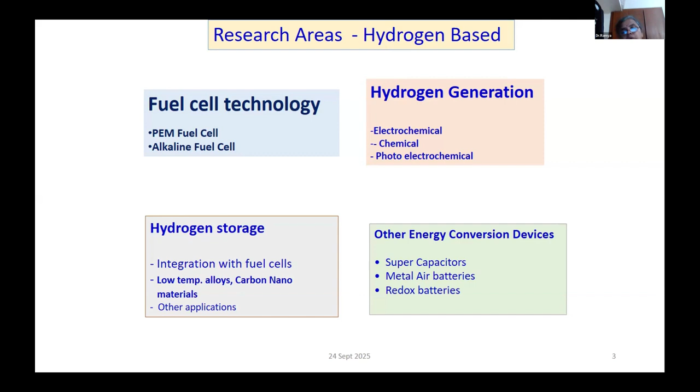And we also do some redox flow batteries, basically vanadium based redox flow batteries. Coming to the technology as such, like the previous lecture, you would have heard about energy storage systems. These are basically capacitors, supercapacitors, or batteries.

So when do you select which product? If you want a lot of energy for a short span of time, you would go for capacitors and supercapacitors. Battery gives you energy for a longer duration, but the power density will be less compared to capacitors. So if you want a short burst of energy, like to crank a vehicle, and that time it draws more current from the battery, it is not very good for the battery. Suddenly you are drawing more than the rated capacity.

So you use a supercapacitor or a capacitor in conjunction with the battery. Once the cranking is over, battery takes over. Batteries have a limited capacity, in the sense of the energy being stored within the battery. Once that energy is consumed by discharging, you do not have any more capacity for the vehicle or whatever as a power generator. So you have to recharge the battery, and that is likely to take several hours depending on the type of battery.

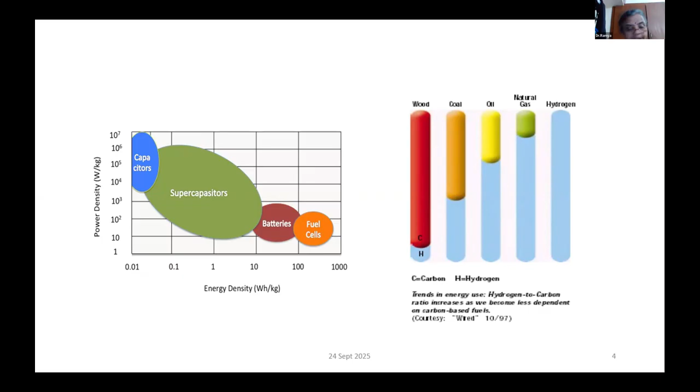What is the advantage of a fuel cell? Because you use hydrogen, the emissions are very less. When you use wood, coal, oil or natural gas, the carbon emissions are higher. But when you use a hydrogen based fuel cell, the emissions are nil, because only hydrogen and oxygen combine to give water, which is the only byproduct.

So fuel cells are of many types. Like I said, we are doing polymer electrolyte membrane based fuel cells. You have other types also - phosphoric acid, molten carbonate, or solid oxide. It all depends on what is your working temperature and what is your electrolyte.

If you are looking at low temperature fuel cells, alkaline or polymer electrolyte membrane based fuel cells are useful because these operate in the temperature range of 50 to 80 degrees centigrade, and they can be easily started - amenable for low temperature startup. They are quite well developed, in the sense they are commercialized. There are buses running with polymer electrolyte membrane fuel cells, with a good efficiency of about 50%, and you can have hydrogen or methanol as a fuel.

If you are looking at working temperature of 160 to 220 degrees centigrade, phosphoric acid is the go-to technology. The advantage of going from low temperature to higher temperature is that your hydrogen need not be very pure. In case of PEMFC, your hydrogen has to be more than 99.999% pure - 4-9s or 5-9s. Then only your fuel cell will have a long life.

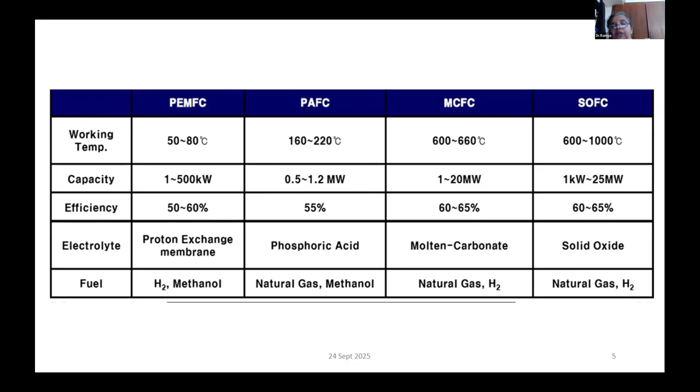If your hydrogen is from a reformer where it can contain some amount of carbon monoxide, a few ppm, it is better to go for phosphoric acid based technology, which can accommodate this, because the higher the temperature, the catalyst can withstand these kinds of poisonous gases and performance can still be retained. Molten carbonate and solid oxide fuel cells are technologies which work at very high temperature. You have higher efficiency because the heat generated is of very high quality. You can have combined power and heat generation - when you attach those systems, your efficiency increases. So they are very good, and you can use a higher percentage of carbon monoxide, or natural gas in some cases.

So what is a fuel cell? Basically, it is like an electrochemical cell, just like a battery. It has an anode and a cathode, with the only difference being that chemicals are stored outside the cell and fed into the cell when required. So there is no self-discharge kind of thing in case of a fuel cell, because you are feeding the chemicals only when it is required.

Chemical materials are stored outside the cell, fed into the cell, and react electrochemically, converting chemical energy to electrical energy.

In the diagram, you can see a typical fuel cell, which is a PEM based fuel cell. Hydrogen is fed into the anode, and oxygen or air is fed to the cathode. At the anode, the hydrogen is split to form two protons, which pass through the electrolyte and react with oxygen to form water at the cathode. The electron movement gives you the electricity.

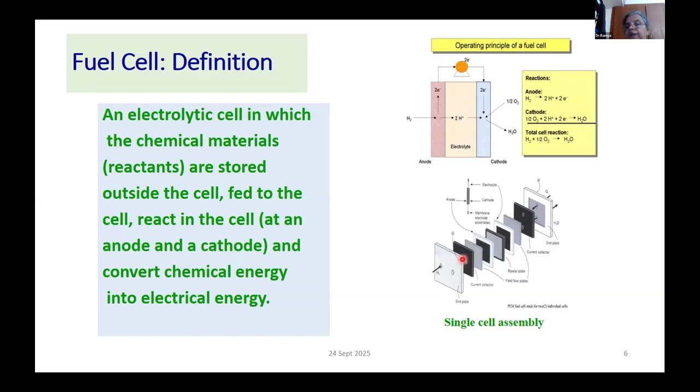A typical single cell assembly requires, since you are feeding gases, some method to feed the gas into the cell. You have to ensure the cell is leak proof, so the gas does not flow out, and it is useful for the reactions. A typical cell has an end plate, a current collector, a gas distribution plate, and a membrane electrode assembly, which is the heart of the fuel cell, where the anode, cathode, and electrolyte are present, along with some kind of sealing system so the gas does not leak.

So what is the difference? Reactants are stored inside the battery, but here they are stored outside. In a battery, there is a possibility of self-discharge; here there is no self-discharge. A battery is grid dependent because you have to recharge it, so it becomes grid dependent. Here, since everything is stored outside, it is grid independent.

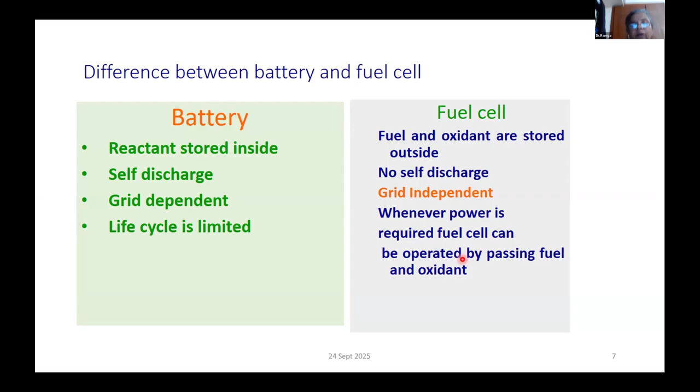The life cycle of a battery, you would have seen some 500 cycles or 1000 cycles depending on the type of battery - the life cycle of the battery is limited. Here you are getting power whenever you feed gases into the system, and a typical life of a stationary fuel cell is more than 40,000 hours, and for a vehicle system it is more than 10,000 hours. So the life is not limited by the number of cycles.

So why do you choose PEMFC? Because it is scalable - you can design cells depending on whatever capacity you require, from low power applications like portable applications to a power station. You can combine multiple cells depending on how much power you require, and they are efficient, with more than 40 to 60% efficiency, and they are reliable, and their response time is very fast.

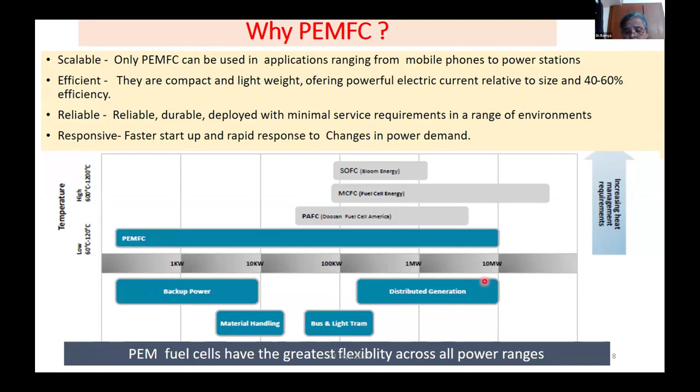If you look at the fuel cell, PEMFC is applicable for all kinds of applications, from low power to high power - 10 megawatt is also available. PAFC normally is employed when it's not for day-to-day home application where you start at low temperature - they are normally used as stationary power at a very high kilowatt level. Both molten carbonate and SOFC are also for stationary power at a large scale level. Whereas PEMFC is used for all backup, material handling, buses, and distribution systems, so it has a lot of flexibility across all power ranges.

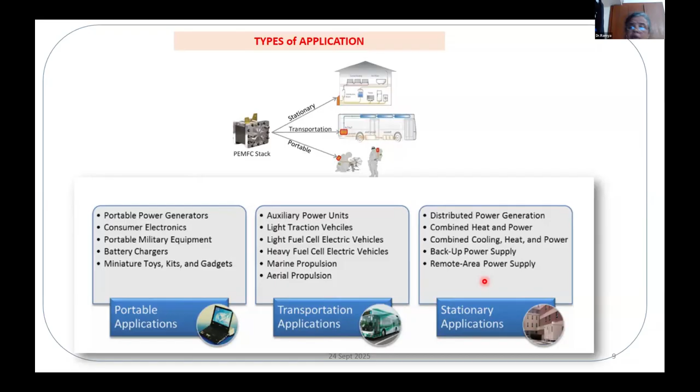A typical application for a fuel cell can be for consumer electronics, small portable military equipment, battery chargers - it can be any of those things. For transportation application, you have seen our minister driving a Toyota Mirai car. You have heavy duty vehicle applications, and you can also use it as auxiliary power for various applications in vehicles. On the stationary side, you can have distributed power generation, combined heat and power for homes and other applications, and as backup power for telecom applications - an immense number of applications are possible with a typical fuel cell.

So how much voltage does an average fuel cell, any single cell, generate? Theoretically, it can generate 1.21 volts. However, because of various losses, you get over-potentials and losses because of the catalyst, called activation loss. Your fuel cell will start at somewhere around 1 volt, but at 1 volt you will not get any current - it's only an open circuit voltage. Once you start drawing current, the voltage comes down. A typical fuel cell operates at around 0.7 or 0.6 volts and remains constant.

You can draw current - you have a region where the voltage is more or less constant, and that is the region where you have ohmic losses due to resistances from the membrane and contact resistances. Once you start drawing still more current, the voltage starts to fall suddenly - this is called the mass transport region, where you are not able to feed more oxygen or hydrogen in the short span that is required. So you operate the cell in the ohmic region.

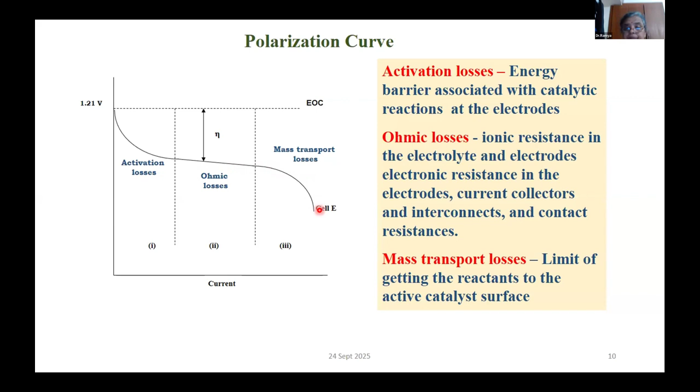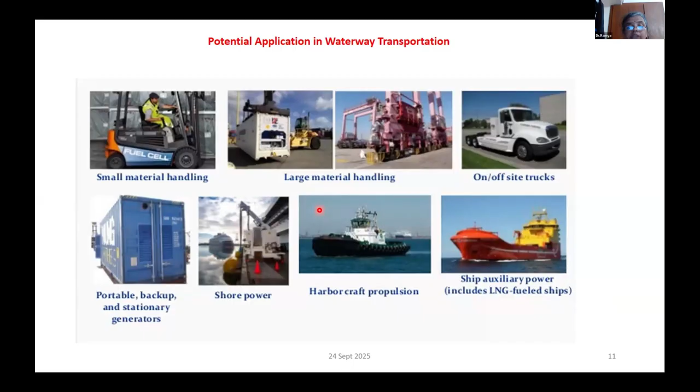So, like I said, potential applications are many: small material handling, or large material handling, off-site trucks, portable backup power generator. Kerala was the first to demonstrate a boat with a PEM fuel cell.

Now in the land, trains, buses, and long-haul trucks are the main application. India has recently completed testing of its first hydrogen-powered fuel cell train, built in Chennai. The prototype will run between 2 points in Haryana, and the government proposes to deploy 35 such trains on heritage and hill routes to reduce emissions.

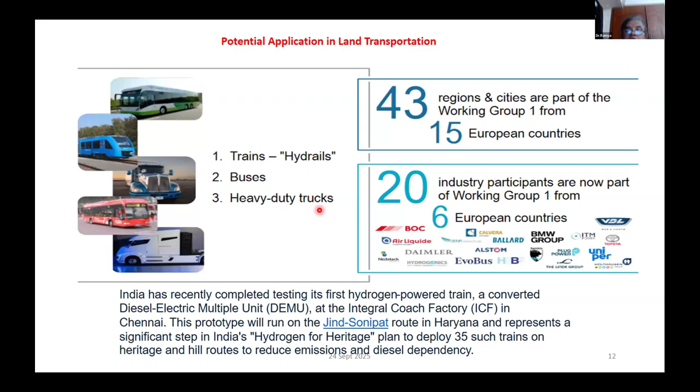A little bit about the history of the fuel cell. In 1799, a French scientist said that hydrogen can be used as a force that can be applied on all machines. The first cell was a water electrolysis cell back in 1939. Then in 1959, there were fuel cell prototypes sent on the Apollo missions.

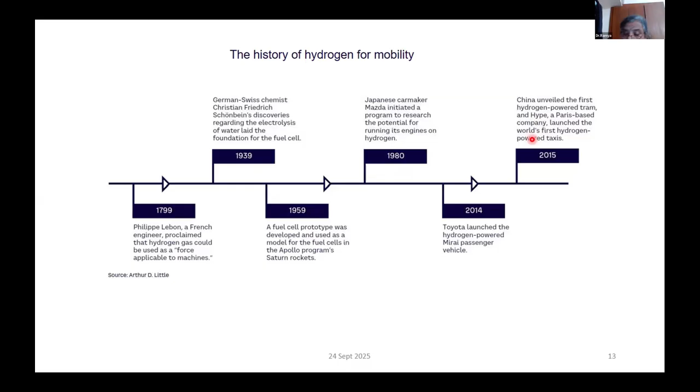In the 1980s, car makers Mazda and Toyota launched hydrogen-based vehicles. Toyota has the Mirai, which is a car. Now there are trains and many other applications for hydrogen. This is basically hydrogen for mobility applications, whatever I have covered.

Having seen all these things, what are the major materials and components that are required? Since it's a polymer electrolyte membrane fuel cell, you need a membrane, and then there is an anode and a cathode. Both require a catalyst, so you have to break hydrogen H2 into H+ ion, and you need some kind of catalyst for that.

Similarly, oxygen has to react with the hydrogen H+ ion, so you need a catalyst for the oxygen reduction reaction. Both catalysts mostly applicable in PEMFC are platinum-based, noble metal-based catalysts.

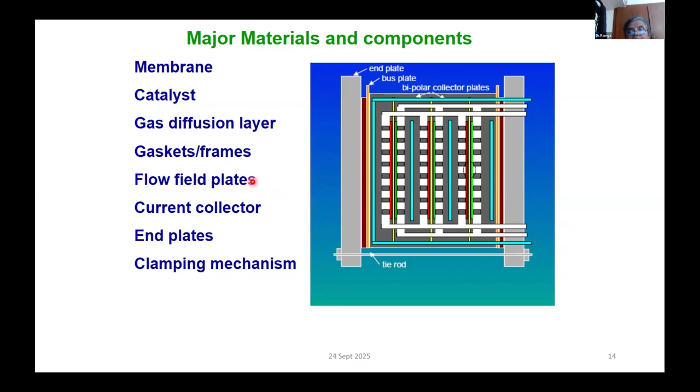Then you have what is called the gas diffusion layer. Gas has to be supplied across the electrode fully, so you require a substrate which can distribute the gases across the catalyst - that's the gas diffusion layer. Apart from that, you have flow gaskets - since gas should not leak, you need gaskets. Flow field plates, current collectors, end plates, and some kind of clamping mechanism ensure that gases do not leak.

What are the electrochemical techniques used in a fuel cell? If you have a catalyst and want to study its properties, how good it is, you do what is called cyclic voltammetry, which tells you about the oxidation and reduction reactions and what kind of activity is there for hydrogen oxidation or oxygen reduction. So cyclic voltammetry is what you do.

You can also do linear sweep voltammetry, which is again a variation of cyclic voltammetry, to study the half reaction in detail. Then you need to know what kind of resistance each cell component is contributing, so you do electrochemical impedance spectroscopy.

Also, because the membrane is acidic, you have corrosion of the components, so you do corrosion studies. Apart from that, you can study how good your electron transfer is, the rate of electron transfer, electrochemical reaction mechanisms, transport properties - all these things you can do.

By doing all these studies, you can study the catalyst, the binding agent, the cation impurities that are there. If you are doing a direct methanol kind of fuel cell, you can study how much methanol is crossing over across your membrane, and you can study the poisoning.

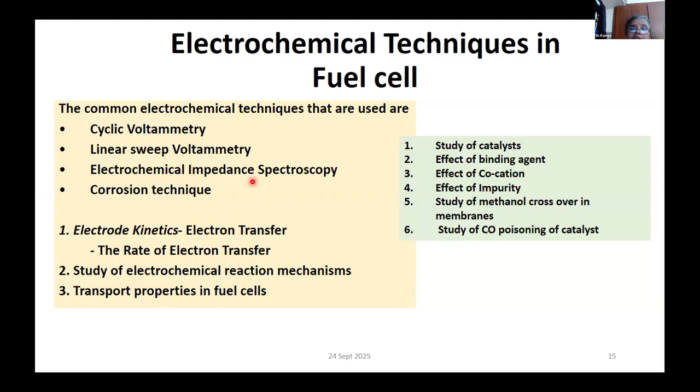All these studies you can do with electrochemical methods. So what are the main driving forces in PEMFC research, or what is it you want to achieve with the materials? There are two main things: one is to improve the technology, the other is to reduce the cost.

If you look at the cell components, there is a catalyst, a membrane, and a bipolar plate. The bipolar plate is used to distribute the gases. So these are the three major components, and you can see there will be a lot of studies on catalysts.

Many papers are there on catalysts - platinum alloys, platinum supported, pure platinum, all kinds of catalysts are there. On the membrane too, there are many studies, but most PEMFC research is based on Nafion as the membrane, which is a trademark component from DuPont. Most research is carried out with that membrane, not much else, because this is a fluorinated membrane.

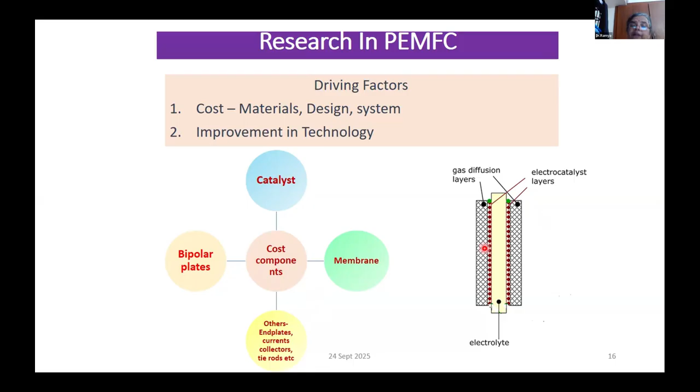I'll come to the reason why not much research is on that. Then you have bipolar plates, that is another component. Apart from this, all the other components are minor, so I have put them together. The heart of a fuel cell is basically a membrane electrode assembly - there is a membrane and two electrodes. How well you form this membrane electrode assembly decides the current you can get from the fuel cell.

Let's first look at the first component, catalyst, which is mostly noble metal - platinum only is used as a catalyst, because we have two different atmospheres. First, it is an acidic environment. Second, you have hydrogen, which is highly reducing, and on the other side oxygen, which is highly oxidizing. For that kind of environment, platinum is the best catalyst, because it is stable. You don't see platinum getting oxidized.

If you look at the volcano plot, platinum has the highest activity for these kinds of reactions, so that is the most commonly used catalyst. This platinum you can use as pure platinum particles, what is called platinum black, or supported on carbon. When supported on carbon, the platinum particles are in the range of 2 to 4 nanometers, and chances of coalescing back during the reaction are very less. So most research is on platinum supported on carbon.

Again, how do you reduce the cost? You can achieve it by improving catalytic activity. For that, you can do particle size reduction of the platinum - from 20 nanometers, 10 nanometers, down to 2 to 4 nanometers, you can get better activity. Or you can improve dispersion in the slurry before making the electrode, which also makes a lot of difference in what kind of performance you get.

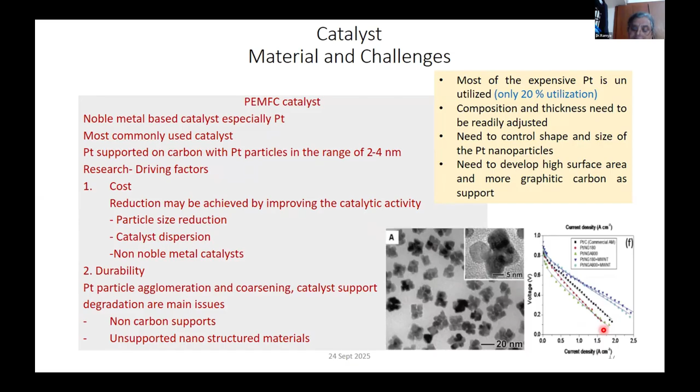The second component is the polymer electrolyte membrane. Most research uses Nafion as the main material, which is a DuPont trademark. It is very expensive because you start with tetrafluoroethylene gas, and there are more than 7 steps to finally arrive at the membrane. The use of this fluorinated material is what is driving the cost component, and it is also because it is a monopoly. What you require is good barrier property.

The gases, hydrogen and oxygen, should not mix, and the membrane should have very good mechanical strength, thermal and chemical stability, and very high conductivity for transport of protons. Basically they are all ionic polymers with high conductivity.

So what are the substitutes for Nafion? A lot of studies have gone into many other aromatic polymers, which have been sulfonated and used as polymer electrolyte membrane. However, their performance is not very good, and their stability is also not very good in oxidizing and reducing environments. As a result, they are not much commercially known.

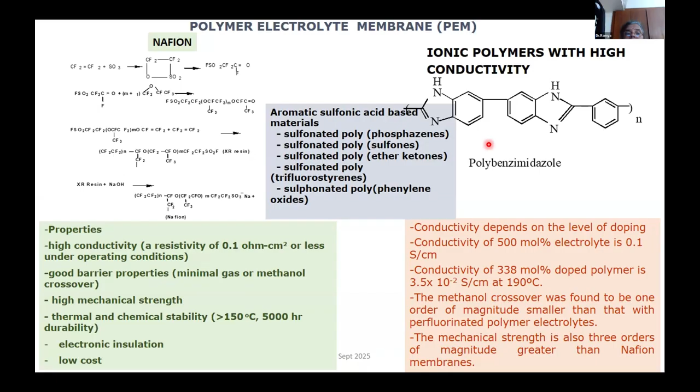If you want to start at low temperature, of course you have to go to Nafion.

Your whole idea is to ensure that the gases are distributed across the whole plate completely, and your current collection is very good, so that your performance is good.

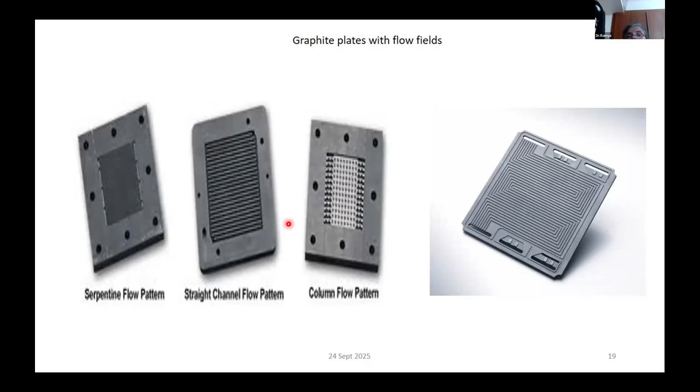One of the major difficulties with graphite is that it is very high cost, and these designs are basically machined actually. You have to use a CNC milling machine to generate these designs, and that makes these plates—since graphite is basically brittle—problematic.

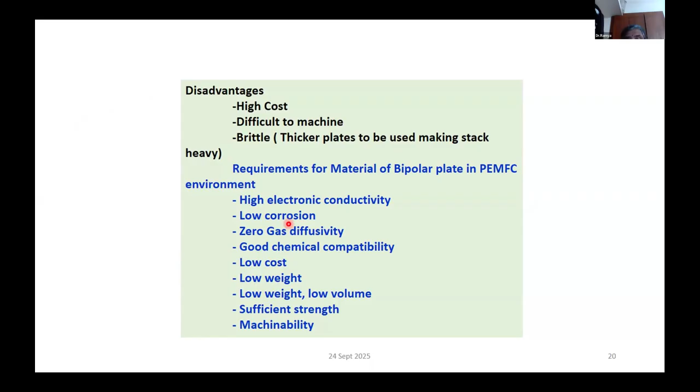What you are looking at in material properties: high electronic conductivity, low corrosion, gas diffusivity should be low, good chemical compatibility, low cost, low weight, and all that. But like I said, graphite is very expensive.

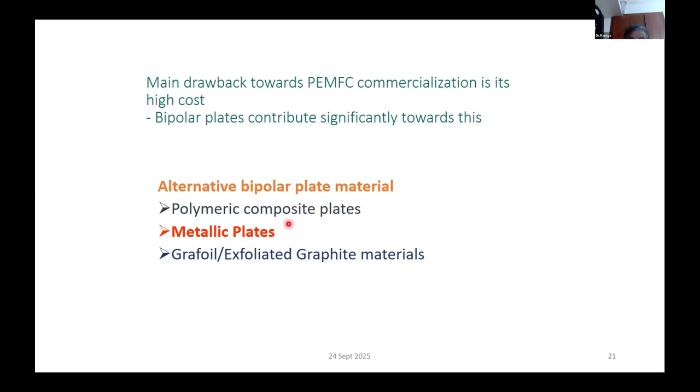So if you want to reduce the cost of the bipolar plate, you should look at alternative bipolar material—basically a polymer composite or a metal plate, which can easily be stamped, where the design can be formed by stamping or hydroforming or other techniques. Or you can use graphite based material, which is exfoliated graphite, which can be compressed. You can do compression molding on these kinds of materials also.

So if you do a noble metal based plate, then they are non-corrosive, nothing happens to them. They are very good to manufacture. You can do thin plates, but they are very, very expensive.

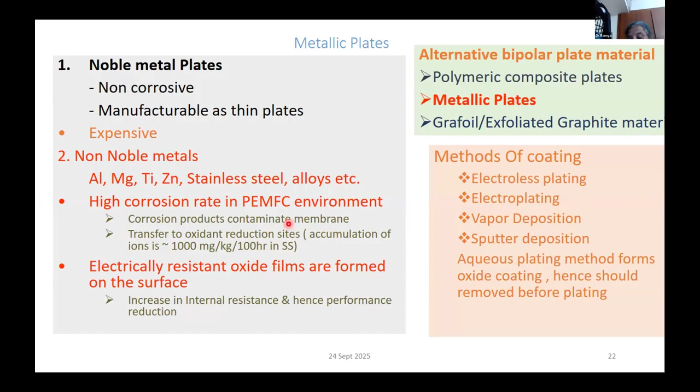So what you do is you go for a non-noble metal like aluminum, magnesium, titanium, or stainless steel or alloys, and then you try to do a high corrosion resistant coating on them. Otherwise the metals that leach out will contaminate your membrane. So you have to do a corrosion protection coating, basically done by various techniques like electroless plating or electroplating, vapor deposition, and so on.

So if you look here, graphite has very good conductivity, but cost is also very high. There are many pros, which is very good—it suits all our applications. However, they become very expensive and they are very heavy also.

Conducting plastics—conductivity decreases because you have a plastic component in them. The cost comes down, of course. They can be easily injection molded, but the problem is the low conductivity.

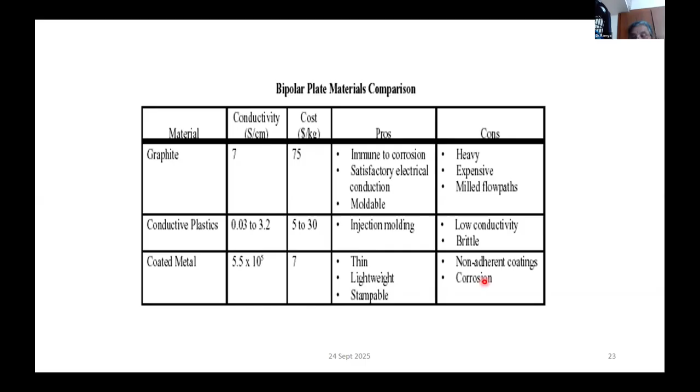In case of metal, the conductivity is very high, cost is also very low. You can do thin, lightweight, very thin plates actually. However, you have to do corrosion protection—corrosion is the main problem, so you have to do a coating.

So here is an example where you have a comparison between graphite and treated metal. You can see that the power density when you use a metal-based bipolar plate is very good because of the conductivity and other properties.

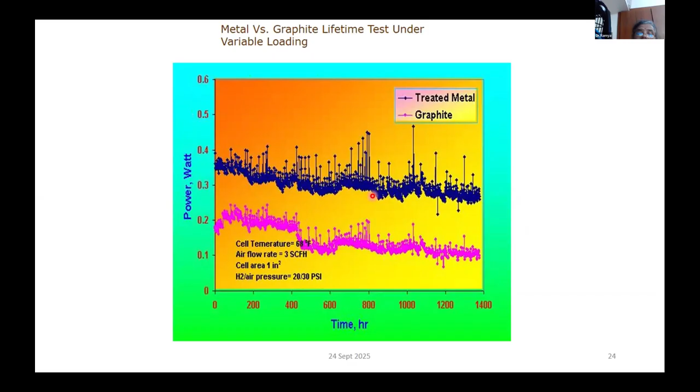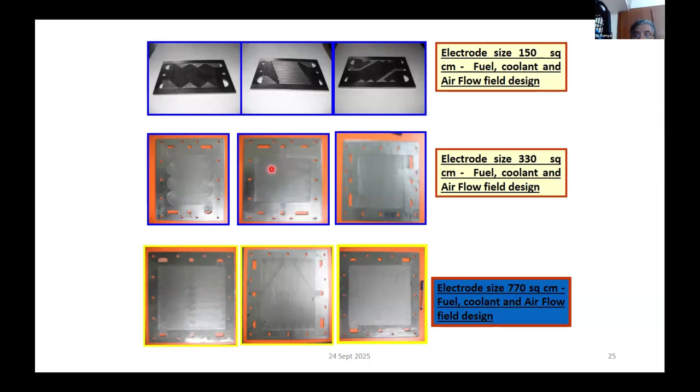So at ARCI, what we have done is we have developed exfoliated based graphite plates. These are much thinner. They are done by compression molding, and we can do various sizes. There are many designs, and we have done various types of plates actually.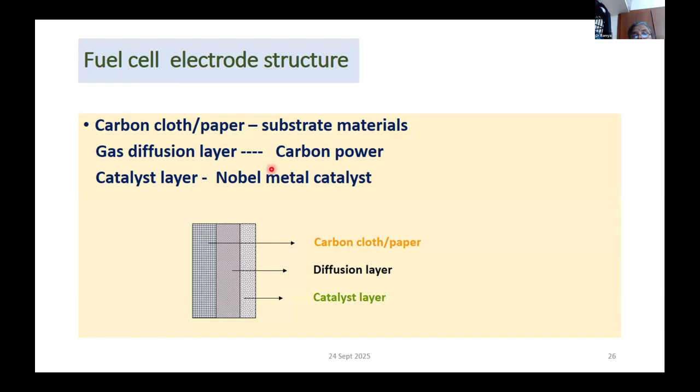So let's now look at the components. We have seen the materials; now look at the components. So you have a catalyst. I told you we have to do a gas diffusion layer, and then make a membrane electrode assembly actually. So for that, typically the electrolyte is the membrane, and the catalyst is coated either onto the membrane or onto the gas diffusion layers.

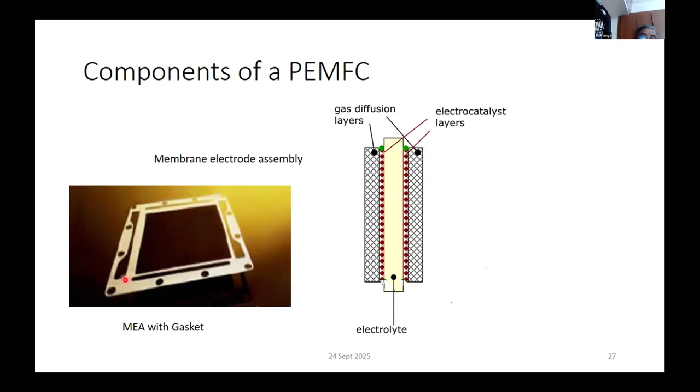All three components are made into a single unit called the membrane electrode assembly. A typical membrane electrode assembly looks like that, and there is a gasket which ensures that the gases do not leak.

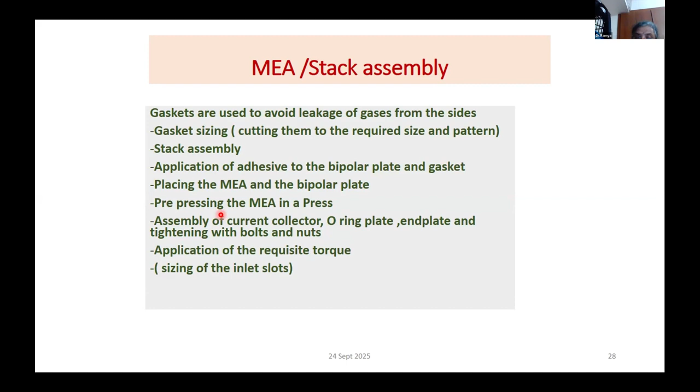You have to apply some kind of adhesive to make sure they stick to the bipolar plate, or have channels where you can place the gasket. Then you pre-press the membrane electrode assembly, assemble the current collectors, and ensure no gas leaks using an o-ring or end plate. Then you tighten them with bolts and nuts so there is no leakage of the cell.

This is how a typical cell is assembled, where multiple cells come together. An individual cell will only give you 0.6 volts, so for a 12 volt or 48 volt application, you need multiple cells in series. You need some mechanism to assemble the cells and clamp them together.

Once you have assembled the stack, you can do studies varying temperature and pressure to see the maximum performance you can get. If you run a cell, you will see the dynamics and performance are influenced by the reactants, how much reactant flow excess and what kind of flows you are giving. If you give excess flow, the membrane is likely to dry and performance will reduce over time.

How well you manage this matters, because when you run a fuel cell, equal amount of heat is also generated along with the power. So you have to have some mechanism to remove the heat, otherwise the membrane will dry.

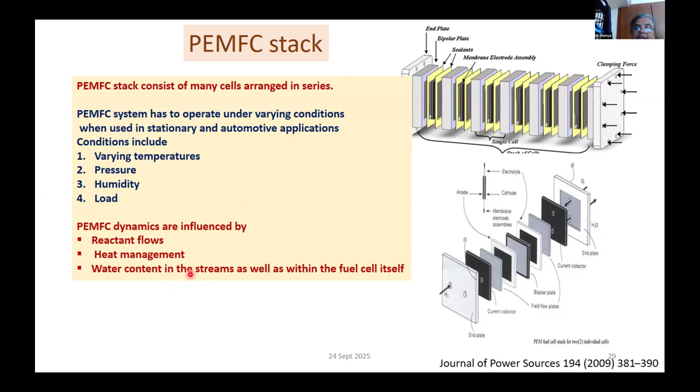So what we do is humidify the gases. Gas streams contain some amount of vapor, so the water content given to the cell is monitored. These are the various parameters that you monitor.

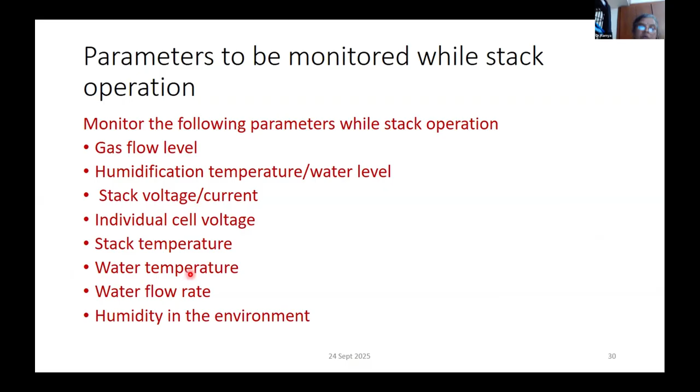What is the gas flow level, the humidification temperature, the stack voltage and current you are generating. You have to monitor individual cell voltages, stack temperature, water flow rate, humidity - everything has to be monitored.

So if you look at the technology, we have seen the materials, how to make the components, the membrane electrode assembly, how to assemble it into a single cell, and then how multiples of single cells come together into short stacks or a large stack.

Now, having done all this, you have to have what is called the balance of system. You have done the stack, but you need some method to supply air, hydrogen, and coolant. You also have to manage the heat, so you need a thermal management system.

Fuel cell generates DC power, and it's a variable DC. Open circuit voltage is 1 volt, operating voltage is 0.6, meaning your converters should be able to accommodate this large variation - about 50% variation in voltage. So these are not your normal inverters or converters; you need a special kind of power management system.

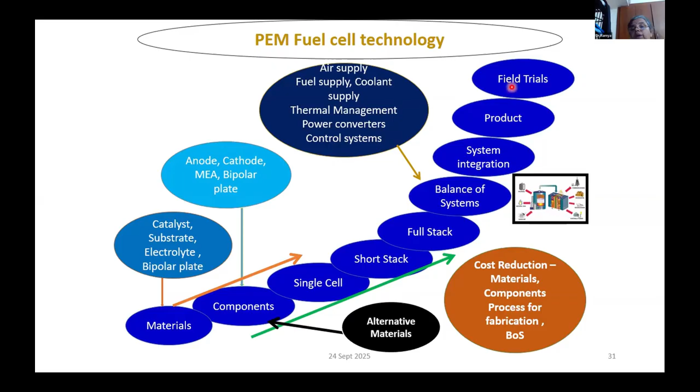Then you need a control system for everything. If you want remote monitoring, you need some kind of control system. When you integrate all these things, you get what is called an integrated fuel cell system, which becomes a product that can be tested in real time applications.

If you look at the balance of plant components, first you have to have an air and fuel supply system. For air, you need some kind of air compressor, and for fuel supply, you need valves - either a proportionate valve or a mass flow control system. For thermal control, you need humidifiers to ensure the gases are humidified before passing through the cell.

You also need some kind of heat exchanger to remove heat from the stack, and a radiator fan assembly if you want a closed loop system, to ensure the heat is dissipated into the atmosphere.

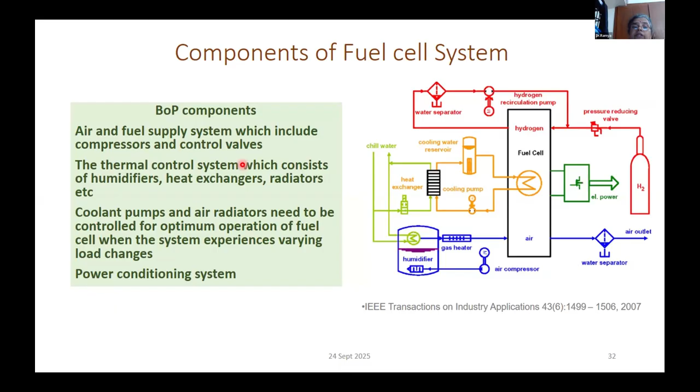For this, you have to have some kind of coolant pumps, air radiators, power conditioning systems - all these things are required. If you want to recirculate the hydrogen, you have to always give 10% or 20% excess, so that the water does not stagnate within the cell. So if you want to recirculate the hydrogen, you have to have some kind of recirculation mechanism, a recirculation pump or an ejector kind of system.

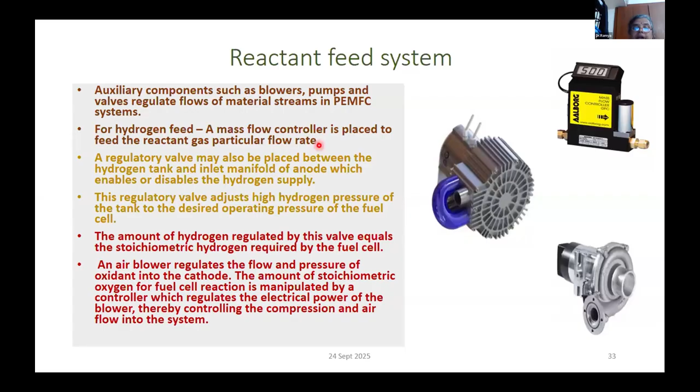So many auxiliary components like blowers, pumps, valves - all these things are required. You have to ensure that the feed gases do not stop, so you should have sensors to sense hydrogen presence, and it should also not leak. So you should have leak detectors and regulatory valves. All these are required for a complete system.

Like I said, one of the main components in PEM is that the membrane always has to be humidified. Otherwise, the conductivity of the membrane decreases, and the performance will decrease. So the gases have to be humidified for that.

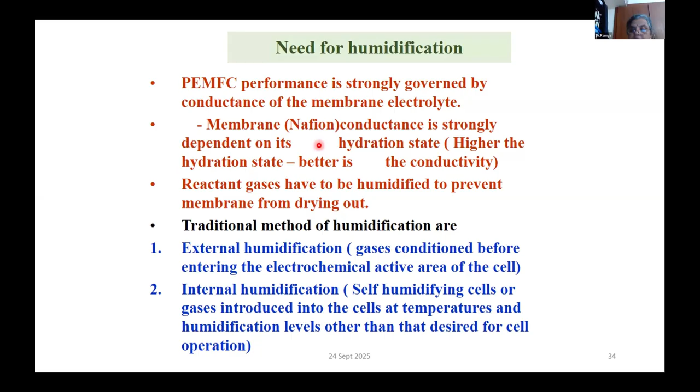There are different methods of humidification. You can do an external humidification, where the gases are preconditioned before sending them into the cell, or you can do an internal humidification where you modify your electrode structure so that the water produced is retained within the cell and is useful for maintaining the humidity of the membrane. These are the various conventional methods.

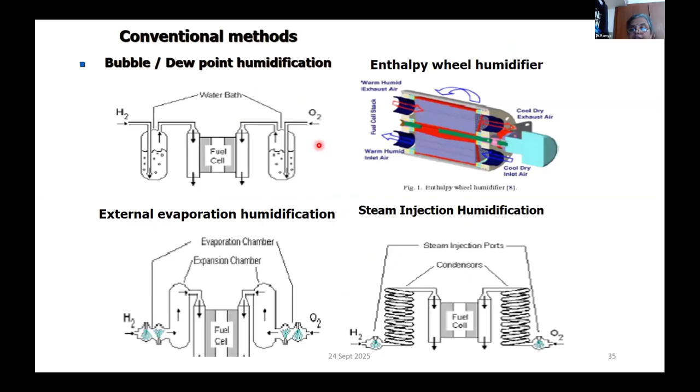You bubble the gas through a column of water, or you use an enthalpy wheel based humidifier, or you have an evaporator in the chamber where the water is evaporated and steam can be injected within the system. All these things are possible. Another type possible is a membrane humidifier, where you have a membrane.

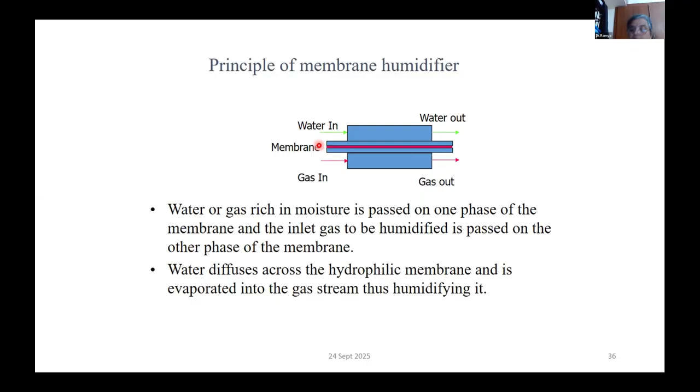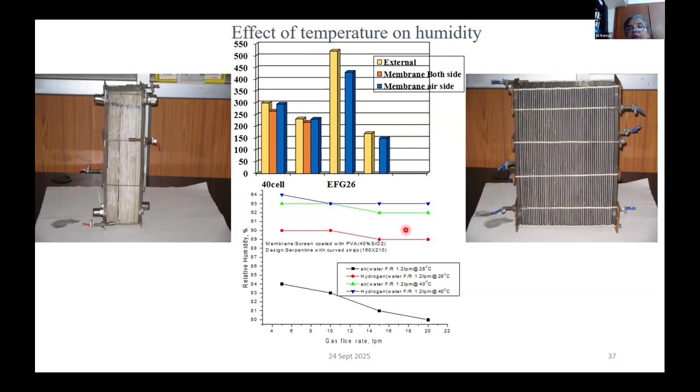On one side, you have water, and on the other side, you have gas, and across the membrane, the gas picks up the water and then humidifies the inlet gas to the stack. This is the kind of system we had developed, based on PVA based membranes, and we had developed water-to-air and water-to-gas humidification systems. We studied the various properties of all the membranes, how it works, and how many cells are required for a particular kilowatt of fuel cell and everything. The other option can be a gas-to-gas humidifier.

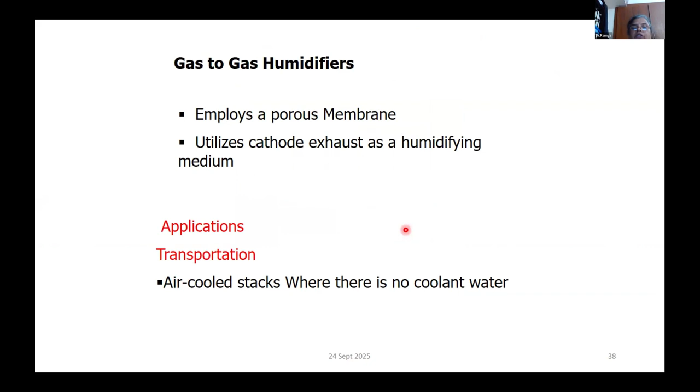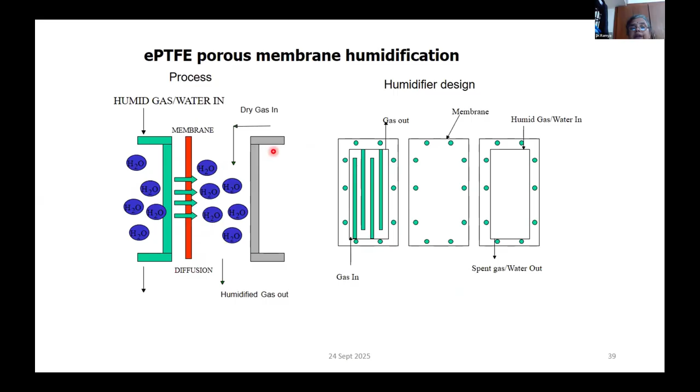In this, what you do is the oxygen side is where the water is produced, so you have that water-rich outlet gas as one component passing on one side. On the other side, you have a dry gas, and you use a porous membrane. Water will diffuse across this porous membrane and the gas will be humidified. This is meant basically for an air-cooled stack where there is no coolant water available. The membrane is a porous membrane, and the water moves across it, and the dry gas gets humidified and you get a humidified gas.

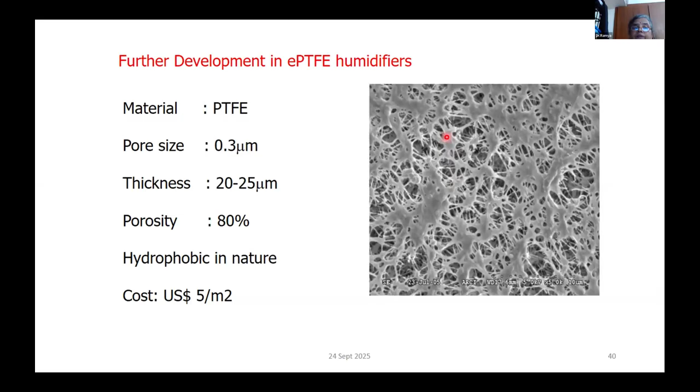For such kind of humidifiers, you use expanded Teflon based membranes. These have more than 80% porosity, and these can be used for making these kind of humidifiers. You have to size your humidifier according to the amount of gas that you are giving, studying with respect to the flow rate, what kind of humidities you can get, with respect to temperature, and what kind of outlet temperature you are getting from your stack. Based on all these things, you can size your humidifier.

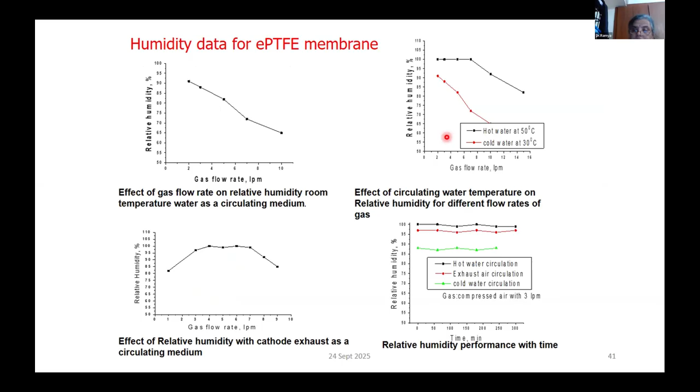So the last component, like I said, is a heat exchanger. You have to have some kind of thermal management system to remove the heat from the fuel cell. If you look at the performance for a fuel cell, the operating temperature is about 60 to 70 degrees centigrade. As a result, your delta T is very less.

Ambient water temperature will be around 40 - once it comes out of the fuel cell, it will be some 30 to 40 degrees centigrade, and the maximum operating temperature is around 60. So under those circumstances, your performance will be very less, because the delta T is very less. You will not be able to cool the stack properly.

If you can improve your performance to above 70, and have a delta T difference of 20, 30, 40 degrees between the coolant and the outlet, then your performance will increase, and you will be able to effectively use a heat exchanger to remove the heat. These are the kinds of systems being developed for fuel cells.

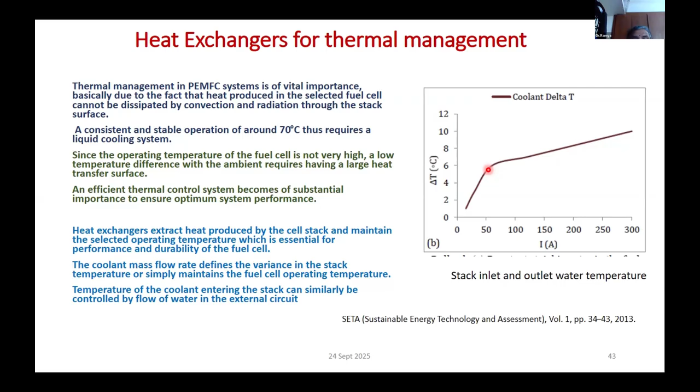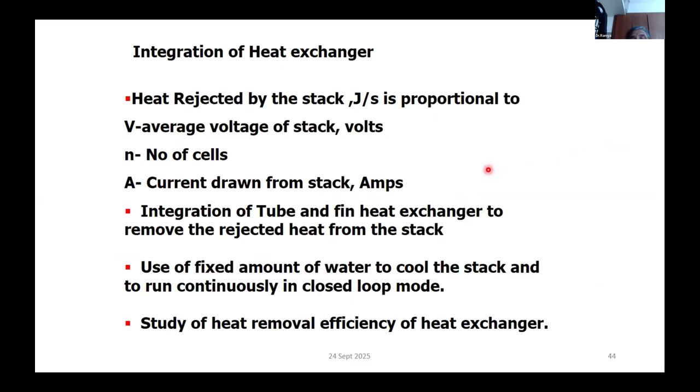So basically, what are all the things you have to look at? The amount of heat you want to reject from a fuel cell, the voltage of the stack, and the number of cells. All these things you have to know before designing a heat exchanger.

In a typical stack, the stack will give you an equal amount of heat. Part of the heat is normally used for humidification of the gases, hydrogen and air, and then it goes to the water reservoir, and from the reservoir through the heat exchanger, so that all the heat is removed before it is pumped back into the stack.

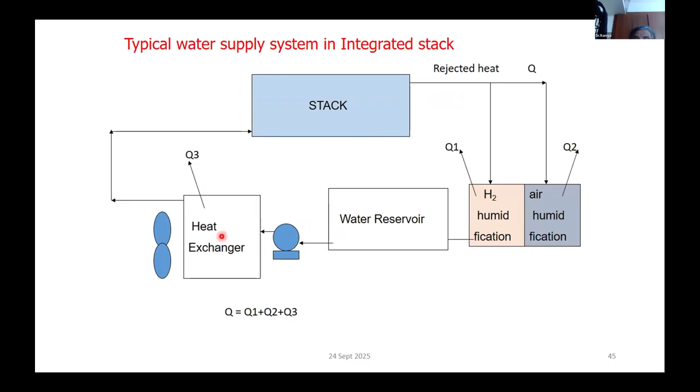So here is an example: if you are generating 2.3 kilowatts of electrical power, about 2 to 2.5 kilowatts of heat will also be generated, and part of it, like 0.7 kilowatt, is used for humidification, and the rest 1.8 kilowatt has to be removed through the heat exchanger.

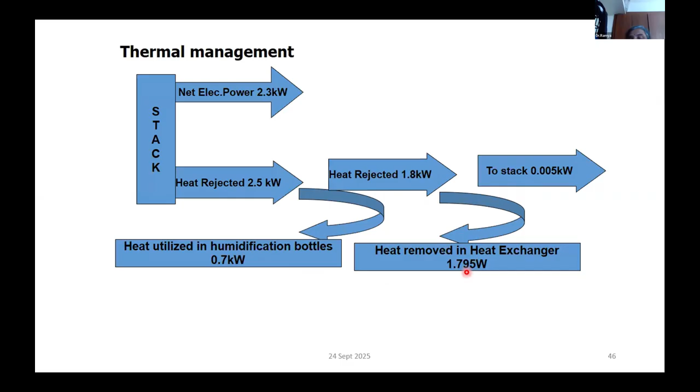The last component is the control system, because your performance will depend on the amount of hydrogen and air that you are giving. If you give a very high flow rate, the membrane will dry and your performance will decrease. So you have to have some control on the stoichiometry of the gases.

You need proportional integral controllers, and various kinds of controllers are required. For controlling the system, you have to have some kind of feedback controller, so that depending on the current, the amount of gases is regulated, so you don't want excess, and so that you don't have to recirculate more. All these things have to be taken care of while operating a fuel cell.

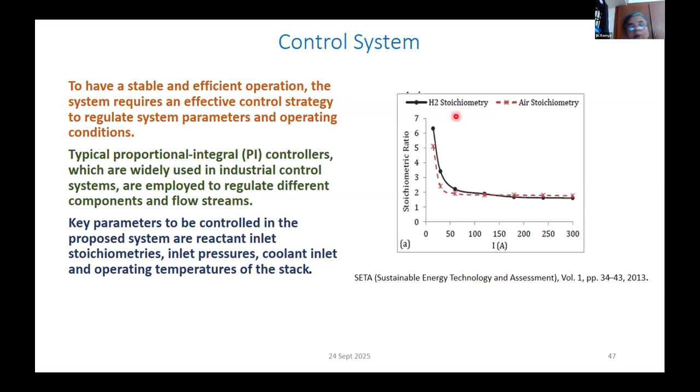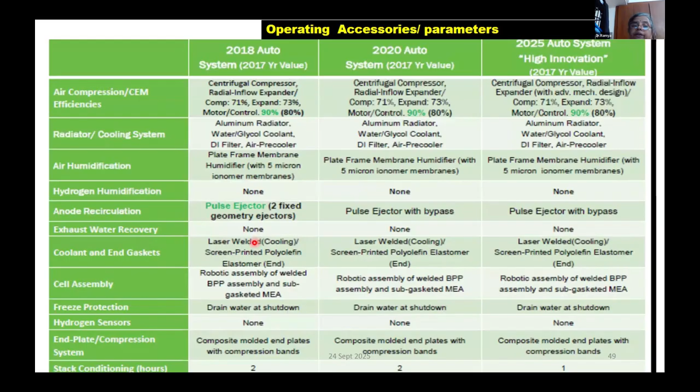So let me come to what we are doing at ARCI.

At ARCI, we are developing these catalysts. We have developed one platinum on carbon-based catalyst, on what is known as functionalized acetylene black. These catalysts have very good durability. This technology we have transferred to one company.

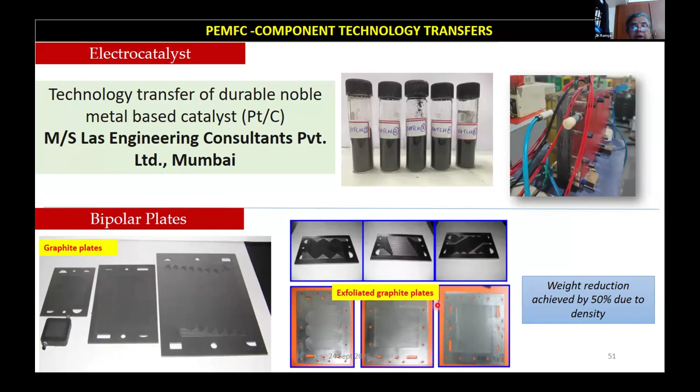We have also developed graphite plates based on exfoliated graphite material, with many designs, made for us by a company. Based on all these things we have made various products, from 1 kilowatt fuel cells up to 10 kilowatt in a single stack, and 20 kilowatt using a multiple of two stacks. In the portable size, we have also made a small fuel cell for charging applications.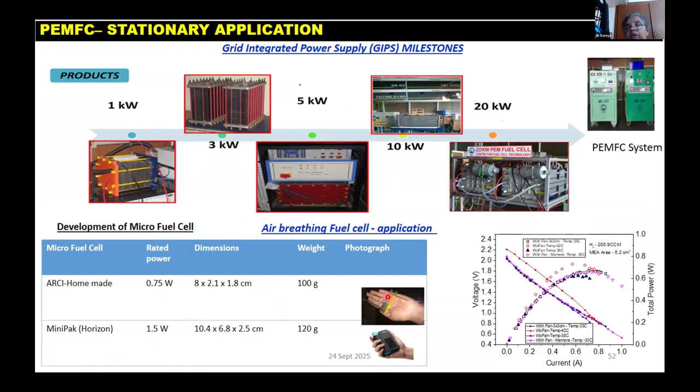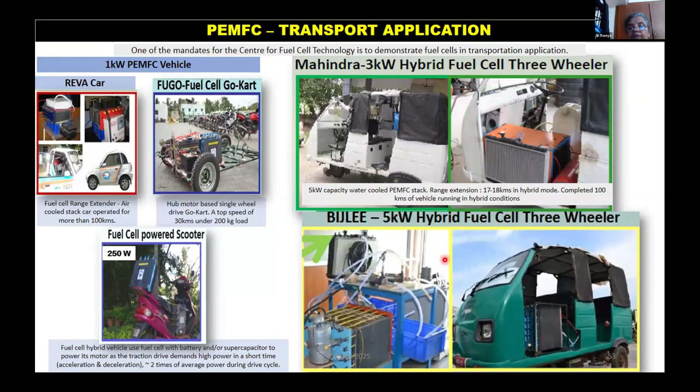We also have something in the 0 to 300 watt range for charging and other applications. In transport, our stacks are slightly bulky compared to commercial stacks, so it was only a demonstration for range extension, which we did for a Reva car. We also did a fuel cell go-kart, a scooter, and a three-wheeler - two different types of stacks were used for the three-wheeler. We have done some demonstrations also.

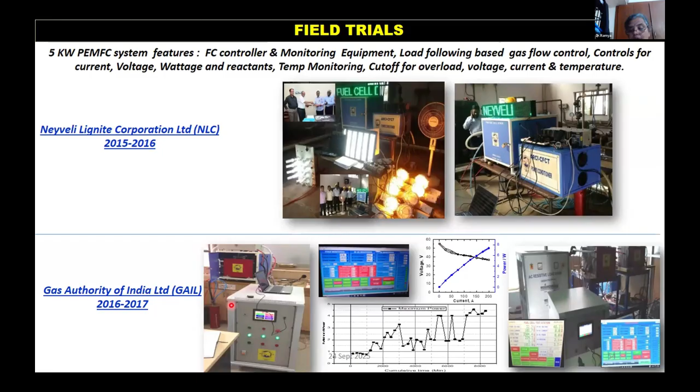We have demonstrated our system at Neyveli Lignite Corporation and Gas Authority of India. Currently, what we are doing is automation of PEM fuel cell stack assembly, starting from materials to the final stack.

Various lines are there: a carbon line, then a Nafion line where the membrane is processed, then an assembly zone, then a stacking zone. So all these things we have developed.

So having seen all these things, what you can see is fuel cells are one method of achieving your net zero targets, where hydrogen and oxygen mix to give only water as product. Fuel cell research is multidisciplinary - you need chemical engineers, metallurgists, material scientists, electrochemists, power control people, so many different kinds of people have to come together to make sure your stack works.

So there is opportunity for all different kinds of specializations.